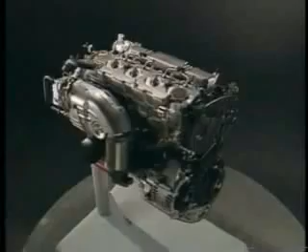The 1CD-FTV is a 2-liter inline 4-cylinder DOHC 16-valve diesel engine with common rail injection system and turbocharger. The engine has adopted numerous cutting-edge technologies. Among them, this video describes the new diesel injection system, which has achieved high performance, clean emissions, low noise, and low vibration.

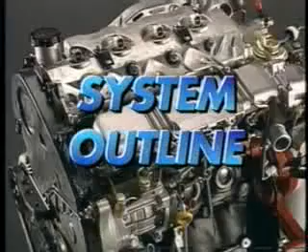The common rail injection system accumulates the necessary pressure required for injection of fuel inside the rail. Just like the EFI system of the gasoline engine, this system injects fuel into the cylinders by opening and closing the injectors in accordance with the electrical signals output by the ECU. Therefore, this system can finely regulate the injection volume and timing, thus contributing to highly efficient operation and clean emissions. Furthermore, because this system accumulates constant fuel pressure in the rail, it does not create sudden pressure rises and offers the advantage of quieter operation.

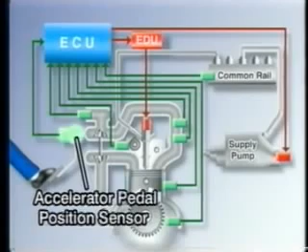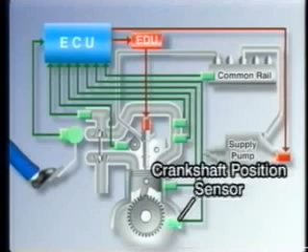Now, let's look at the system. Let's start with the sensors. Here's the accelerator pedal position sensor that detects the opening angle of the accelerator pedal. The airflow meter. The intake air temperature sensor. The turbo pressure sensor. The water temperature sensor. The crankshaft position sensor that detects the rotational angle of the crankshaft. The camshaft position sensor that identifies which cylinder is at TDC. And the fuel pressure sensor at the common rail, which detects the pressure inside the rail.

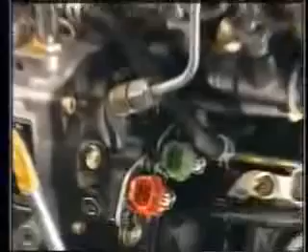Here are some of the actuators used in this system. The suction control valves, or SCVs, which are located on the supply pump assembly, control the amount of fuel that is fed to the supply pump. The electronic driver unit, or EDU, which boosts the injection signal from the ECU. And the injectors that inject fuel in accordance with the injection signal.

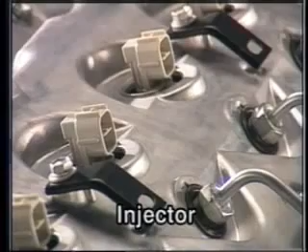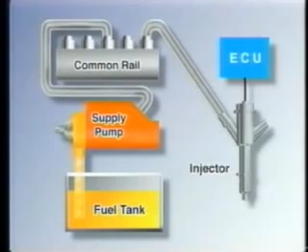The fuel is drawn up from the fuel tank by the feed pump located in the supply pump assembly. Then it passes through the fuel filter and is fed to the supply pump. The fuel becomes pressurized in the supply pump to reach the injection pressure. The pressurized fuel is fed into the common rail where it is accumulated. The fuel that accumulates in the common rail is distributed via the injection pipes to the injectors of the cylinders. Then the injection signal from the ECU opens the injectors to inject fuel.

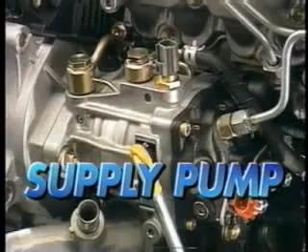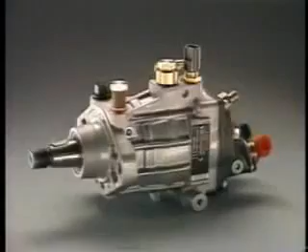The fuel pressure that is created in the supply pump varies according to driving conditions. It is approximately 20 megapascals at idle and increases to as much as 135 megapascals during high-load, high-speed operation. Let's look at its internal construction.

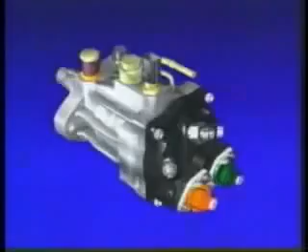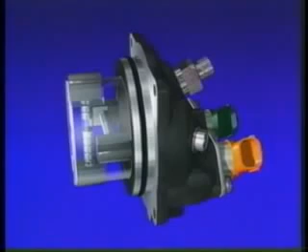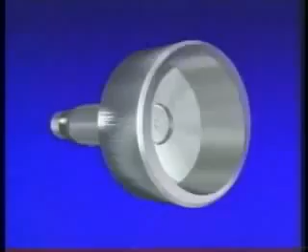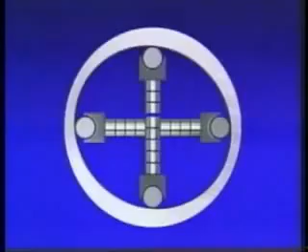The supply pump contains an inner cam, which is driven by the engine. On the inside of the inner cam, there are 2 sets of opposing plungers. Each set of opposing plungers is positioned at a 90-degree angle from each other, and each plunger operates independently. The tip of each plunger is provided with rollers that come in contact with the inside of the inner cam. The inside of the inner cam is oval. The rotation of the inner cam pushes the plungers via the rollers, which effectively pumps the fuel. The use of the 2 opposing plungers in this manner minimizes the drive torque fluctuations, which makes for quieter operation.

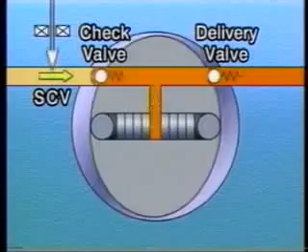The fuel that has been sent by the feed pump flows past the suction control valve, or SCV, and the check valve. The fuel is then pressurized by the plungers and flows via the delivery valve and is fed into the common rail.

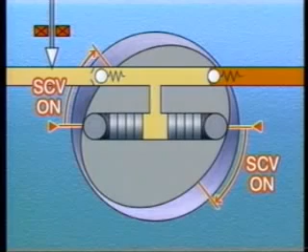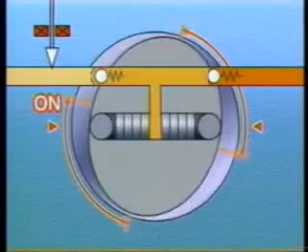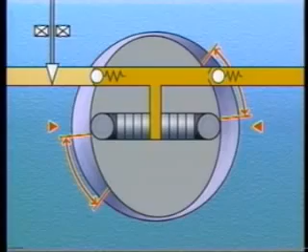The SCV regulates the volume of fuel that enters the supply pump plungers. During the suction stroke, the longer the SCV remains open, the greater the volume of fuel that enters the pump plungers. And because a large volume of fuel is pumped, the fuel pressure becomes high. During the suction stroke, the shorter the SCV remains open, the smaller the volume of fuel that enters the pump plungers. And because only a small volume of fuel is pumped, the fuel pressure becomes low. In this manner, the ECU controls the opening of the SCV so that an appropriate fuel pressure can be reached.

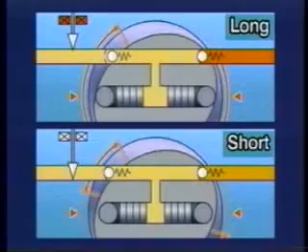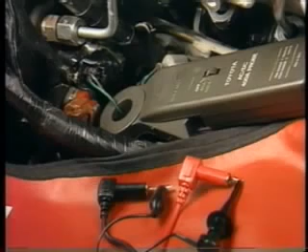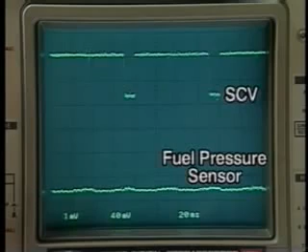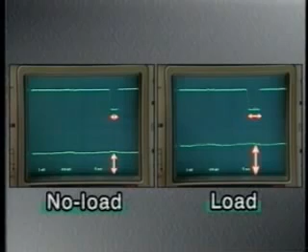Let's watch on an oscilloscope to see how the SCV is controlled. To easily monitor the operation of the SCV, let's see the electrical current that flows through the SCV. The SCV signal is shown at the top and the fuel pressure sensor signal at the bottom. Here's a comparison between the no-load condition at 1500 RPM and the load condition at 1500 RPM. It's evident that in the load condition, the SCV remains open longer and the pressure in the rail is higher.

Thus, according to the signals received from the sensors, such as those of the accelerator pedal or the engine, the ECU controls the SCV in order to regulate the fuel pressure that is needed for the particular driving condition. Then, the resulting pressure is fed back to the ECU by the fuel pressure sensor in the rail.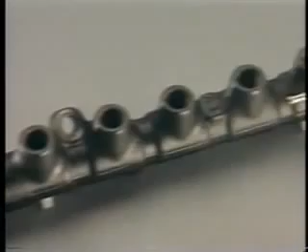The common rail accumulates the fuel that has been highly pressurized by the supply pump and distributes it via the injection pipes to the injectors of the cylinders. A fuel pressure sensor is provided at one end of the common rail to detect the fuel pressure in the rail and to send it as a signal to the ECU.

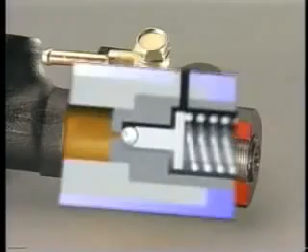A pressure limiter is provided at the other end, so that in the event of a system malfunction, if the fuel pressure rises abnormally, the pressure is relieved mechanically.

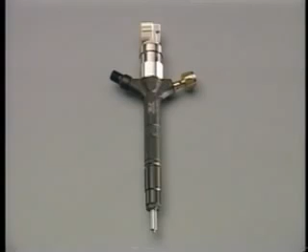On receiving the signal from the EDU, the injector opens its nozzle to inject the fuel that has been accumulated in the common rail. Let's look at its internal construction.

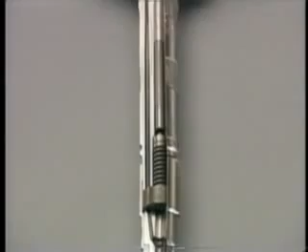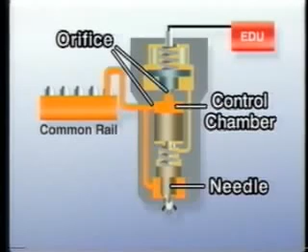The fuel that is fed from the common rail separately enters the control chamber and the nozzle portion of the injector. In this state, the nozzle is closed because of the pressure of the control chamber and the spring force pushes the needle down. Upon receiving the signal from the EDU, the solenoid valve above the control chamber opens. Then the pressure in the control chamber decreases, which causes the pressure at the nozzle to push the needle upward, and the nozzle opens to inject fuel.

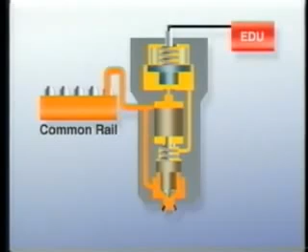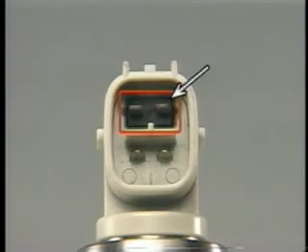A small trimming resistor is installed to each injector to compensate for production variations. The ECU recognizes the resistance and applies correction for injection of each cylinder.

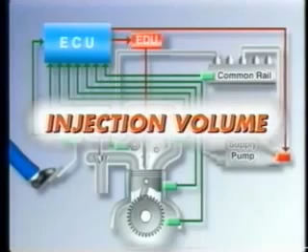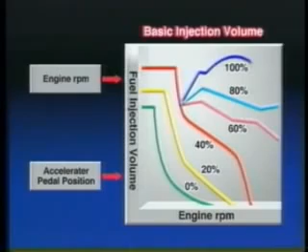How does the ECU determine the injection volume and timing? Let's first look at the injection volume. The ECU calculates the basic injection volume and the maximum injection volume, and whichever is smaller is determined to be the actual injection volume. The basic injection volume is calculated from the engine RPM signal and the accelerator pedal position signal. From these two signals, the injection volume that is required by the driver is calculated.

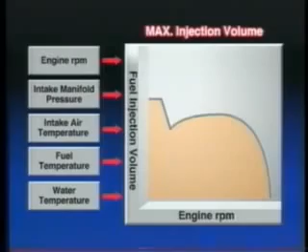On the other hand, the maximum injection volume is calculated based on the actual intake air volume and temperature that have been obtained from various sensors, such as the fuel temperature sensor, in addition to the engine RPM signal. Thus, a volume of fuel that can theoretically be burned completely is calculated. These two calculated values are compared, and the ECU determines the smaller of the two to be the actual injection volume.

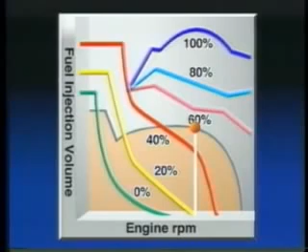In this manner, the ECU is always taking the actual intake air volume into consideration to determine an optimal injection volume that does not generate black smoke. In particular, in the 1CD FTV engine, the changes in the intake air volume during the transient state is detected by the airflow meter in order to correct the injection volume.

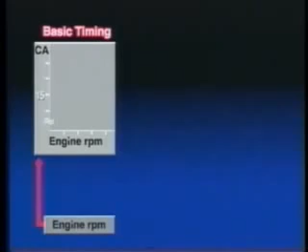Now, let's take a look at the injection timing. The injection timing is determined with the basic injection timing that is calculated based on the engine RPM signal and the accelerator pedal position signal, to which corrections are made. For the intake manifold pressure signal, and the water temperature sensor signal.

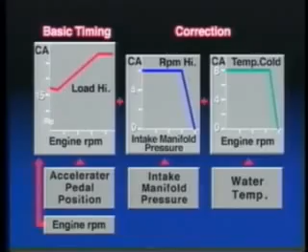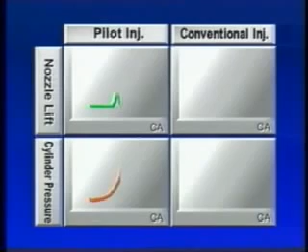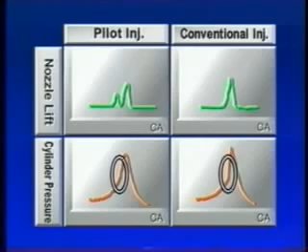Now, let's take a look at the pilot injection. A pilot injection is a small amount of fuel that is injected before the main injection. Accordingly, when the main injection starts, the fuel that was injected beforehand is already burning and serves to smoothly ignite the fuel of the main injection. As a result, a sudden rise in the cylinder pressure during the combustion stroke is restrained, thus enhancing the quieter operation of the engine.

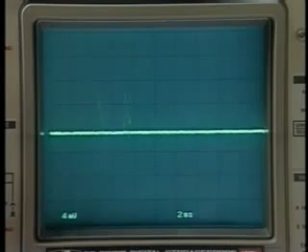Let's take a look at the actual injector signals on an oscilloscope. To easily monitor the operation here also, let's see the electrical current that flows through the injector. It is evident that the pilot injection takes place before the main injection.

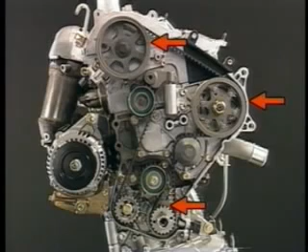To enable the ECU to correctly determine the rotation position of the supply pump, the marks on the pulleys must be aligned while installing the timing belt. The pressure of the fuel becomes extremely high in the common rail. Therefore, pay close attention when installing the unions of the injection pipes or the inlet pipes.

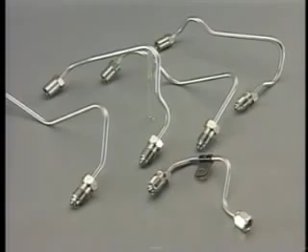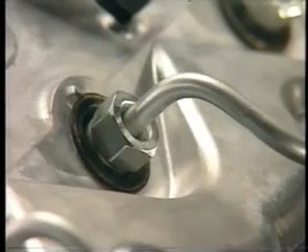If any operation that causes the contact of the union to change, such as the replacement of parts, is performed, make sure to replace the pipe. For details, refer to the repair manual. After tightening a union, make sure to check for leaks with the fuel pressure raised. The fuel pressure can be raised by conducting an active test using a handheld tester.

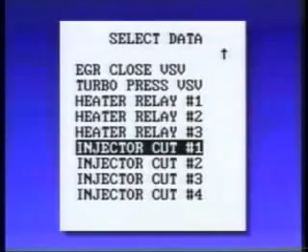In addition, one of the active tests that can be performed is the power balance test, in which the injection to the cylinders is cut off one cylinder at a time. The pressure limiter of the common rail has been precisely adjusted at the factory. Therefore, any adjustment or replacement in the field must never be done.

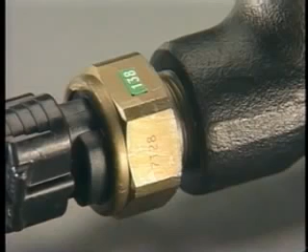During its installation, the fuel pressure sensor deforms through tightening in order to ensure proper sealing with the common rail. If the fuel pressure sensor or the common rail must be replaced, they must be replaced together on an assembly basis because reusing them causes fuel leaks.